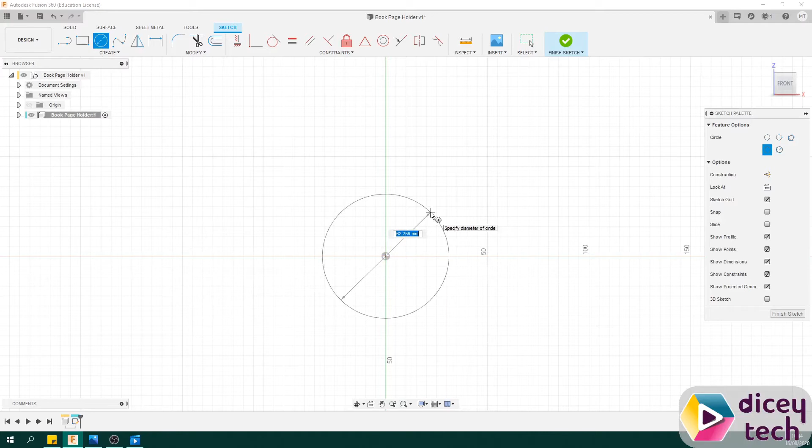Press save. Once you've done that, go to create sketch, select the vertical plane, and then go to circle, select the center, drag it out to the right, and make it 23, and do another circle, drag it out, and make this one 27.

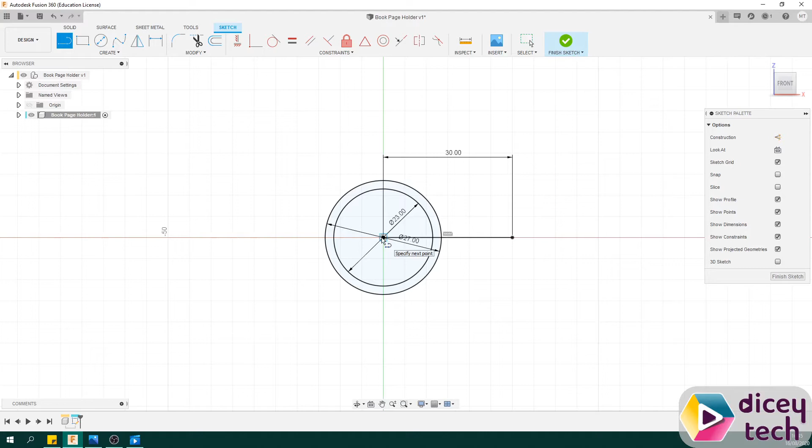Once you have that, go to line, select the center, and drag to the right, and make it 30, and then do the same for the other side. So center, left, 30.

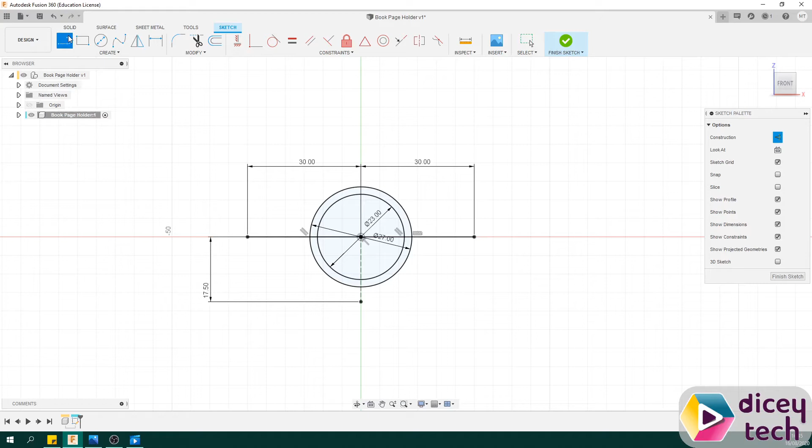And then you want to go to line again, go to construction here, select construction, select the center, drag it straight down, and make it 17.5. Press enter, drag it out, go to line again, but turn off construction as we want this line to be included in our drawing. So click there, select that point, and then from that point to the other side.

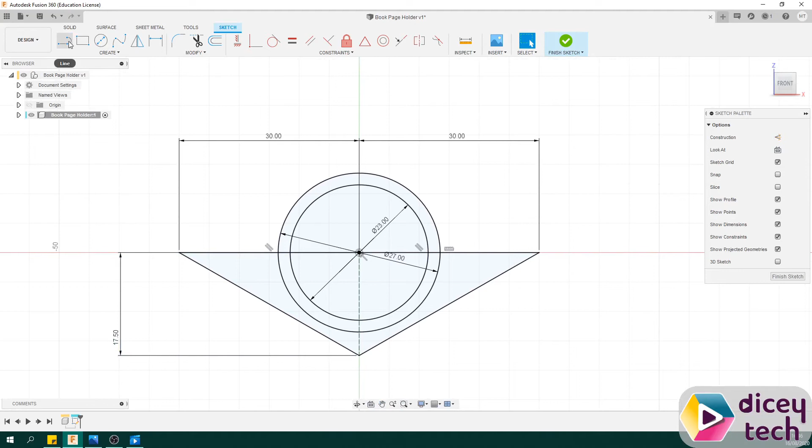As you can see here, this line is dotted, so it won't be included in our overall sketch, as it's only for reference for the distance here. And then once you have that, go to line, draw a line from the center straight up to the top in the middle there, and make it a construction line.

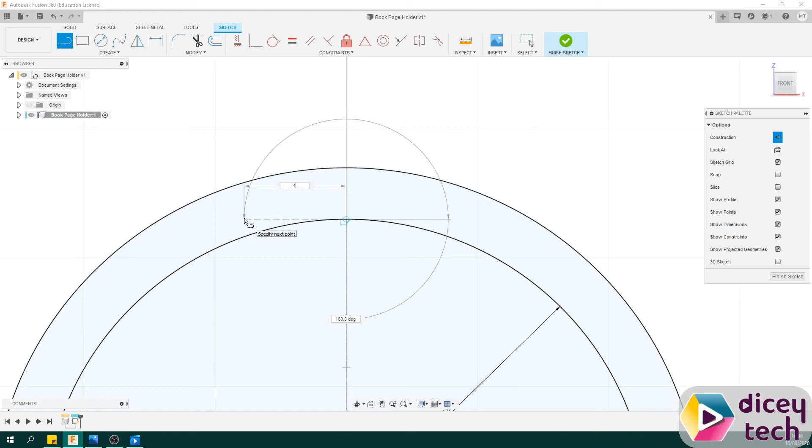And from that point, you want to go to the left and make this one 4.5. And then from that point, you want to go from here straight up to where the outer circle is.

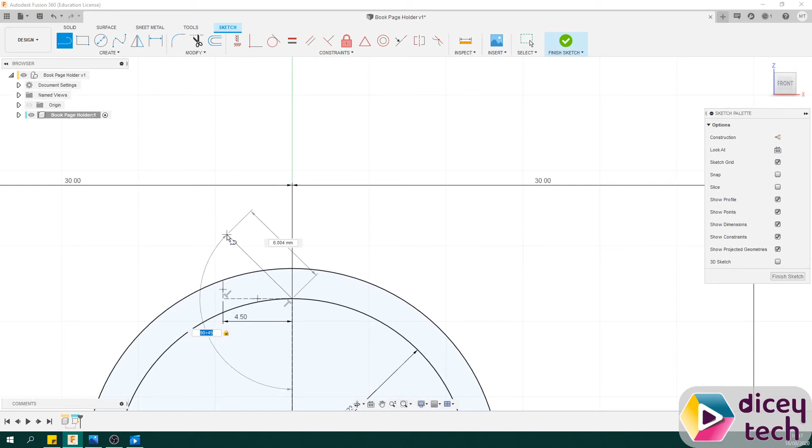And once you have that, turn off construction, select the center point here, go up like that. You want the angle to be 90 plus 45. And then press enter. But before you do that, make sure it's long enough so that it is like this. It means that it's in line with this point. Then press escape,

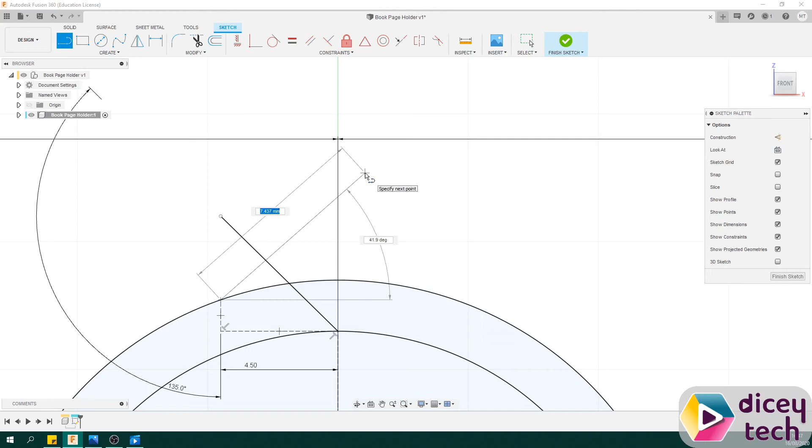and then go to line again. From this point here, drag it up like that, and make this one 45 degrees as well. You should get something like this. And then go to the scissors over here called trim, trim this part and this part. And you should be left with this.

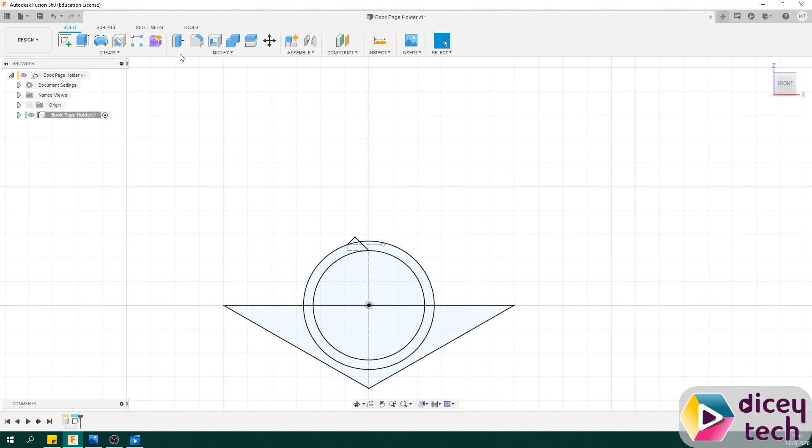And now press escape, click on finish sketch, and go to extrude, as we're going to be making our sketch into a 3D shape. Select this part, this part, this part, and this part, and make it 5 millimeters. And then you want to change direction to symmetric, and then press OK.

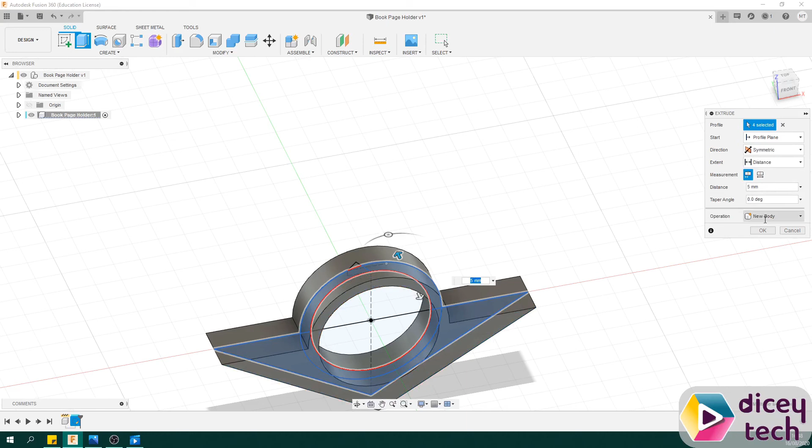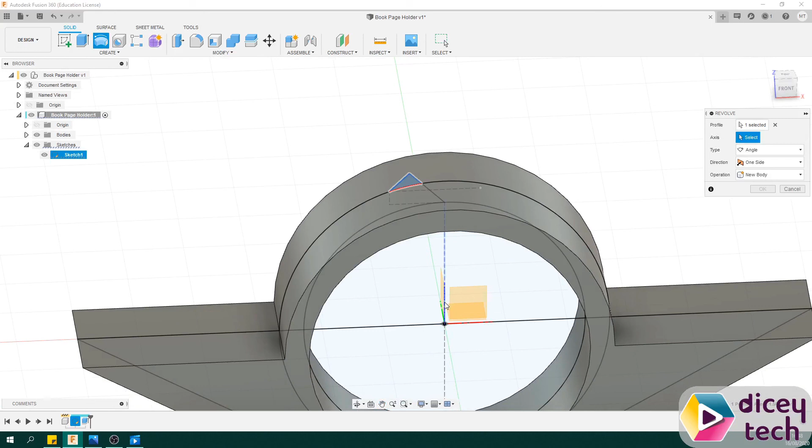After that, open this up, open sketches up, and make sketch number 1 visible. And then go to revolve, select this triangle over here, and then zoom out. Click on the axis here where it says select, and select the blue line right there. You should get something like this.

And then you want to change operation to join. Then press OK. Hide sketch, and that's your first part done. Make sure you save your work, and that's it.